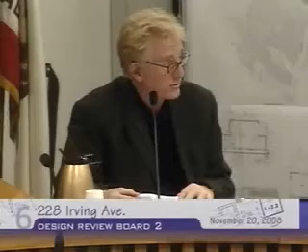Anyone wants to start? Well, I'll start because I'm going to be brief. This is a project that was before us before, and went away with conditions. So I guess as these things come back, you have to get your checklist out to see if those conditions were met.

So we can talk, and then I guess we can keep score. I'm good. Okay, well then I guess we could just go down the list. I wish some of the stuff, I know you were in a hurry to get resubmitted, but I wish you had reviewed what we talked about before so that this would be a little bit easier. So I was hoping you would do that. But anyway,

like we were talking about before, in terms of picking a style, that you would take the opportunity to pick one of those and do things accordingly, like the windows. So if you want to make a checklist of stuff, I don't know what the board's intent is. We could start making a checklist, maybe conditionally approve. I don't know what the feeling is, what you want to do.

Well, I guess staff has presented that they have met these conditions. Let's see, do we agree with that? Well, I don't agree they met, so I was going to make a list of stuff. I could probably be comfortable conditionally approving it if the board was.

I think out of all the items that we mentioned, number 3 would be the one that I would say they were not able to meet. But having said that, the original submittal was being proposed as Tuscan Mediterranean, which we didn't think they were actually going towards that direction. So I think I agree with staff, or the applicant, that now it's more of a minimal traditional style.

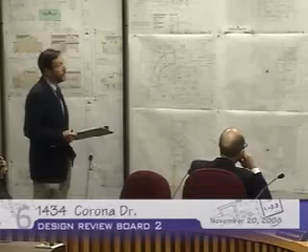A CUP was approved for the lot in July to allow a house to be constructed on the site, and now they're coming in for their design review. The overall slope for the site is about 44%. The footprint area of the house is about 54%. The applicant is allowed to have a 3-story house in that area when you have that type of steep slope, anything over 40%, so they're able to do that.

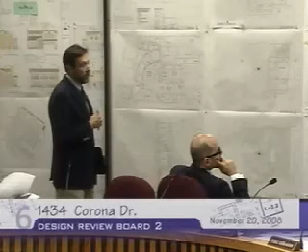Now, as far as the existing property, let me show you these photographs. You can see here we have an aerial view of the site, the vacant site right here. There's a bit of a pad right here, and though you can't see it, there's a retaining wall over there. Back in the 60s, there was a proposal to construct a new house on the site, but it expired. They did build a retaining wall shortly thereafter, but nothing has come since then as far as permits in the city, no construction on the site beyond that.

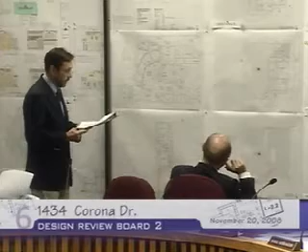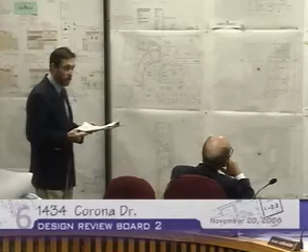As I mentioned, it's in the Adams Hill neighborhood, which reflects many architectural styles and building trends from the 20s to the present time. Homes tend to be built close together, as noted in your staff report. A quick survey of the neighborhood shows about 63% of homes are 2 stories, and about 26% are 3-story homes. This particular lot is the largest lot in the survey area that was submitted and reviewed by the applicant.

There are several categories in our comparison of the neighborhoods and of the site. Under the site planning category, we have subsections of lot coverage, landscaping, parking, retaining walls, and privacy issues. Staff felt that this proposal is fairly consistent with the intent of the guidelines and the overall neighborhood character.

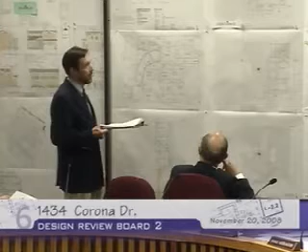In the category of mass and scale, I'd like to bring up a couple of points. It's a little more apparent when you look at the mass and scale primarily from the elevation view from the street. From the side views, you can see how the mass terraces up the hill, which is consistent with our guidelines back from 1993. We've been looking at the same sort of issue here, and that's a fairly realistic impression of how this house will look.

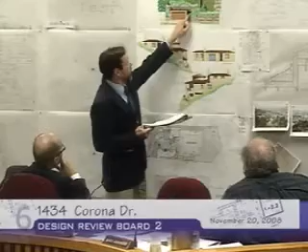The garage, and this is where the height issue comes in, is at the bottom of the hill. You can see there's a little tunnel area that goes back along the garage, and you can either go through the garage door or up and around the corner, and you go to an elevator that will take you up into the house. It looks pretty ominous, but it's all subterranean construction, or at least will be buried after they excavate to construct it.

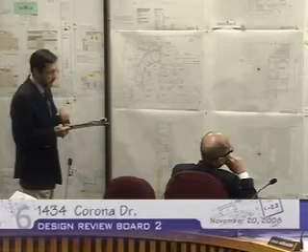One of the points brought up by the neighbors, and it's a legitimate issue, is whether the garage is attached or not, and it is an attached garage. But where that makes a difference is the overall height of the building, because if it is attached, it would be measured from this point.

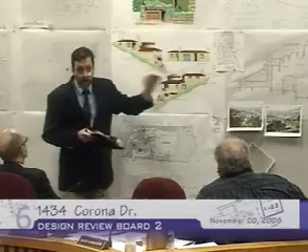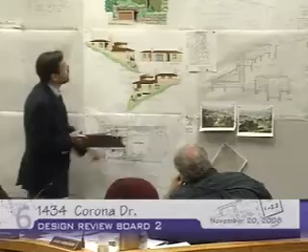If this area here was totally exposed at the time of construction, prior to it being excavated, I handed out to the applicant, to the neighbors, and to yourselves that definition of height. There is that section of the code that allows for doors and openings carved out of the hill, and the only thing exposed is not to be counted as height in the definition of height. So in this particular case, the height of the building will be up at the top, and it begins closer to this area, which we can see is fairly consistent with that area up there.

So the house is about 33 feet in height. See that up on that plate.

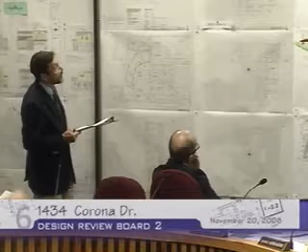As far as setbacks go, the neighborhood note shows there's a large range of setbacks in this neighborhood, all throughout Adams Hill. A lot of homes are built, or garages are built, right up to the street. This particular property's garage is set back, I believe, 33 feet from the street, and the house is set back further from there. So the overall setback is about 72 feet to the face of the building, and to the face of the garage, as I mentioned, it's 33 feet. You can see how the driveway begins at the corner over here, closest to the south end of the property, and then traverses across and enters on the north side over there.

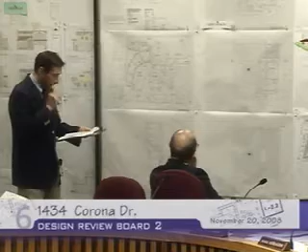In general, in our summary for this area, the mass and scale, we felt that the house fit pretty well within the character of the neighborhood and within the design guidelines and hillside design guidelines.

On the architectural style of the building, which is our last category, building design and detailing, we felt overall that the house's design, which is kind of a Spanish colonial revival style as identified by the applicant, reflects that look, and staff will say so. It should be consistent internally in terms of all the elements working together to create an attractive form. We feel that it will be complementary to the neighborhood and consistent with the intent of the guidelines.

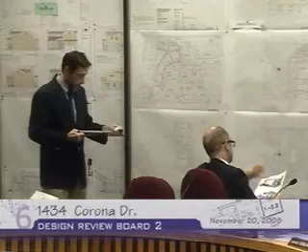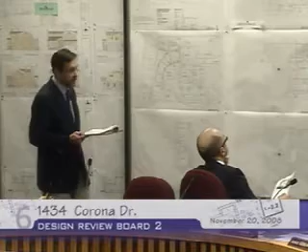The staff did make some recommendations for materials, and we noted that in our conditions below. I'm jumping ahead a bit since materials are another part of that last category, building design. We had some concerns with the retaining walls, stair walls, house foundation walls, and the decorative material that would be used. The applicant did submit some materials for you to look at, and they can go into more detail on their intent. We also had some concerns with the railings — we're looking for a little more consistency, primarily with the metal railings, since we have some that are straight and some that are more decorative. We wanted to work with the applicant on that, and also on showing the downspouts.

What we didn't want was to have downspouts snaking across the front facade of the building.

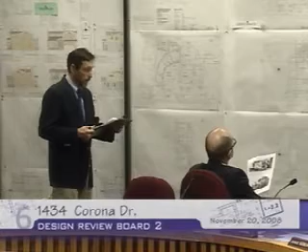One of the things the staff wanted to discuss is that we've met several times with the applicant, and the applicant would be able to discuss this with you also. We've worked from a position of providing guidance for the applicants on arriving at a project that looks like this, where the staff felt that we could support it.

In a little packet you have with some design information, you will find - in fact Mr. Malikian is holding up a copy. This was one of the examples shown by the applicant to the staff, saying we like this kind of look, we'd like to replicate something like this on the hill. What do you think? From there it became a basis for discussion to where we arrived at this project. That pretty much sums up my comments at this time.

I'll answer questions. The applicant's here, neighbors are here. Speaking of neighbors, we have about 12 letters, as you probably noted, that were submitted. I believe 10 or so were in opposition, and a couple of them were in support.

Yes sir, I just have a question on the height issue. If the garage is cut into the hill, so that it doesn't count as height, if the house came down and was near that door, at what point do you then count the low part of the building?

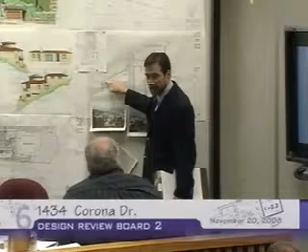Grade. When you say buried - again, now I'm confused, I thought I understood when you explained it to me before we started - but when you say buried, is it open in front of it? I mean, is it visible from the front? May I look at that definition? If I get it handed out to you, because I know...

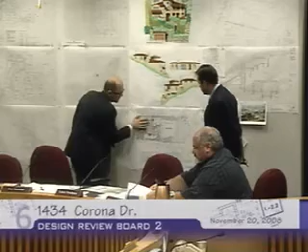I mean, the entire time of construction, this is all removed - this entire hill is removed. So this is all open. The only thing buried is on this side and this side on the map. But now that you're saying that you attach it - well, see, we see this. I'll tell you what we see: we see what you're describing most of the time. We see this kind of detachment, or a feel of detachment. This has a feel of detachment, where in reality it is attached.

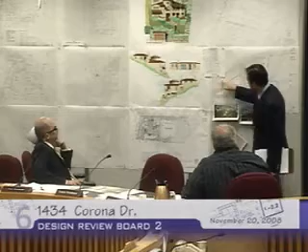And it's an excellent point that the neighbor brought up and kind of pushed us to look at it. The more we look at it, I'd actually say it works out in the applicant's favor, and he can go into detail on how we got to that point if he needs. But most of the time, we see this volume brought right down here, sitting right on this hill, attached to the house, with just stairs going up inside.

But this portion - here's the definition of height, and if you'll bear with me, we'll go through it. Height means the vertical dimension from the lowest point of the building. So let's just start off right here - this is the lowest point of the building, right here. Or right here, okay?

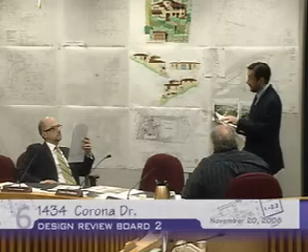Exposed above the ground surface, there it is, you can see it exposed above the ground surface, to the highest point of the roof. The highest point of the roof, right up here. A little pointer.

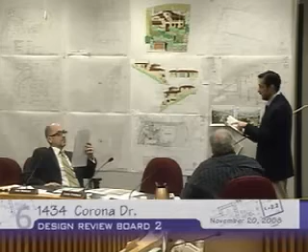Except as may be shown in diagrams, and that's some height stuff there. All right, what about exclusions? Well, the code is full of these things. Chimneys, vents, utility service structures, or portions of a building located below the ground surface existing at the time of construction and exposed as a result of excavation to create door, window, or ventilation openings shall not be included in the measurement of vertical dimensions.

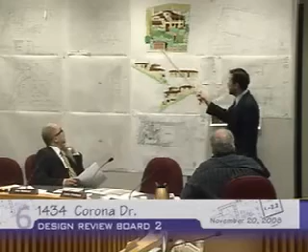So anything below grade at the time of construction? No, at the time of construction. So if this is accurate, and Mr. Gobian is probably one of the premier hillside guys around here, so he knows what he's doing on all these things. Showing this under grade, this is underneath. This door is being exposed. This opening here is being exposed as a result of excavation. And there you have it.

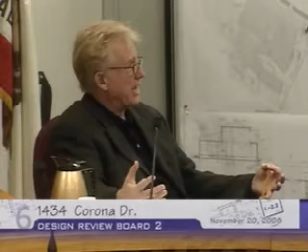Okay? Chris, I have just a question, and I don't for a moment want to upstage the letters that have come in for and against the project, but just my preliminary look at the letters, the homeowners that are in opposition all cite Adams Hill area as more conservatively sized houses, Yes, and they point to this one as a very large house. Yes, sir.

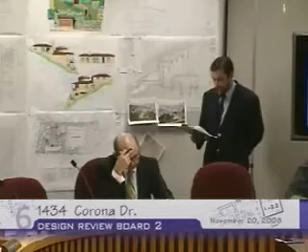Could it be characterized that way? All right, well, let's look at our staff report real quick, and we'll go do a little look at that. On page 2, one of the questions that we have, we have 2 points really: house size and floor area ratio. So the house size, we have a range from just, let's say, 1,400 square feet to about 3,650 square feet. That's the range of homes in the neighborhood. Mm-hmm. But the average is about 2,200, 22 and a half, okay? This particular house would be 36 and a half. Excuse me, 33 and a half.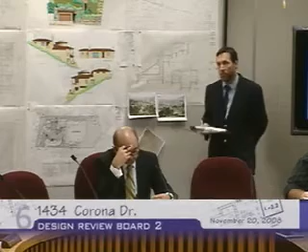So is an extra 1,000 square feet, is that considered to be substantial? And that would be, for staff's point of view, in fact, I think in the planning department, a house size is less of an issue for us than how does the house feel. Does the house feel that it is massive, announcing itself, primary importance, the rest of you guys are losers on the block? That's a big issue. If you can make a house feel that it fits with the character, it could have a pretty substantial floor area.

So staff felt that the house overall, because of the design features and the way it works in the topography, is meeting that characteristic. And plus, being set further back up is kind of pushed away from the street. So it sort of takes it away from the presence right on the street.

Okay, well, we have people who disagree. And thank you. And for those of you keeping score at home, just remember that this board up here, under the new design review guidelines, we're not heavily dependent, but we give great weight to staff's thoughts and recommendations as far as massing go. And that, believe me, as a veteran of these wars, that doesn't completely sway my judgment, but it is a factor. All right, sir. Any more questions I can?

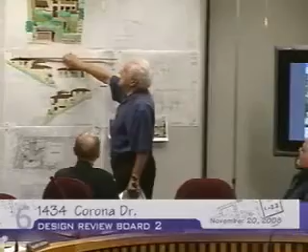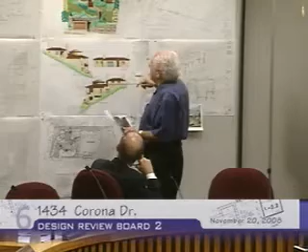If you look at the survey on the right side there, you will see the first floor of that—may I come close to show that? In this house here, I am reading the elevations done by a licensed surveyor, 585. Now, the top of the highest point that we have here is 15 feet lower than this backyard, or side yard, or whatever you name it. So by comparing the house on the left side and the right side, we decided to design our site in a way that gives the best features—the landscaping, the distance, the depth. By doing that, I believe this is one of the best projects that I have ever designed in the City of Glendale.

During this long time of several months, we had several... My time has expired. Your time has expired, so if you can—you have another minute to continue.

Okay, we had several meetings with the staff at the city, and we went through a lot of changes and massaging and different options. We made maybe 3 colored elevation renderings to see which one was right, and we ended up with this version, which I believe is authentic. Beside what you see in those pictures, we are trying to use even more detailed, artistic materials to enhance the quality and originality of this Spanish-style house.

The owner is willing to spend the money, which I appreciate—not everybody wants to do that. Some people want to make it as inexpensive as possible, but I believe this will be an addition to that neighborhood. I hope and wish that the neighbors, instead of objecting, will appreciate what we are trying to do here. Thank you. Thank you.

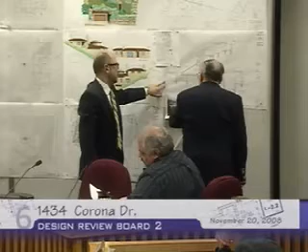Is this existing now? No. So that height—what we're being told is that this natural grade is existing. Okay, but in that height description, that exemption, it says it has to be existing at the time of construction. Does the natural grade need to be existing? Am I correct, or I don't think so. Read that.

Yes sir, oh yes, I'm okay. Could you read it to them? Yes, what I'm talking about—it says that it's existing at the time. The ground surface existing at the time of construction and exposed as a result of excavation to create the doors. Okay, to create doors. Yes.

So what you're saying, though, is you have a concern that a portion of it is being filled in as opposed to being excavated. Is that your concern? Well, what I'm concerned about is the tunnel itself, pushing the house all the way back up on the hill.

We've got a situation up there where there's no fire access to the top part of that house. The only fire access is at the street level. And with the fires we've been having in recent times, and the fires we had on the hill when John Orr was around, it's quite a serious concern, because that house is brought up, way up the hill, right up under our property.

And if that house were to catch fire, by the time the fire department would drag up the hoses from the street, the thing could be well engulfed. A 3-story house would be just like a torch for underneath my home. Now, I've lived on the hill for 52 years, and at this present site for 40. Well, I bought the property in 1960 and started construction at that time.

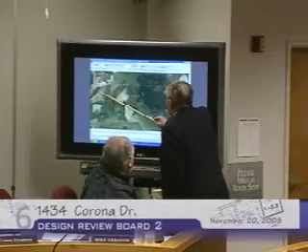Right, you don't get the impression of the distance and the depth, or the effect of where that house is located, on this map. I can show you on the maps that I brought and included in the letters to you guys. Here, let me—you need another view. You need to step back and speak over there because they can't hear you on TV.

Did you receive my letter of the 20th? We have, yes. And as I say in the letter, I'm convinced that this house has an attached garage. Whether the exemption for height or otherwise makes any difference, I don't know. But I'm concerned as to the tunnel, where it's located, the elevator.

The elevator is 75 feet up from the bottom. Is that right, or where does it show on the pictures of the house up there? It's within the house itself. Yes, you cannot see it. Well, on that one drawing there, it shows part of the section, but it's within the dirt and it's beyond, it's in the house. So from the exterior, you're not going to be able to see that.

Now the house is moved way back up on the lot, and as you said earlier when you were considering the possibility of it being moved back down, is there any reason it couldn't be moved back down somewhat? Because at present there's a serious problem with privacy in my home, privacy on both neighbors, and also for the new house. According to the plans, I believe the master bedroom would be immediately into our house, and if it were moved down somewhat down the hill, it would make a big difference.

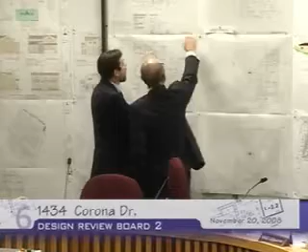Then from that point, let's say 585. Well, let's go with the concrete surface, so 583. Okay, and then we come over here. We want to find the overall height of the house. It says 568, but you have another. That's right. Now this says 68, but I had... say 72.

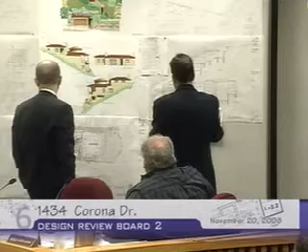At least 11 feet, I can't... yeah, like 11 feet. And I had some other information. I had to wing it here. This distance may not be that height, but it ranges between... Mr. Copeland said it was 15.

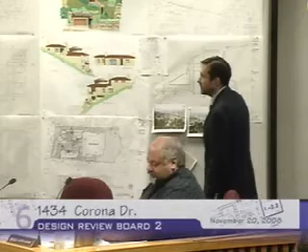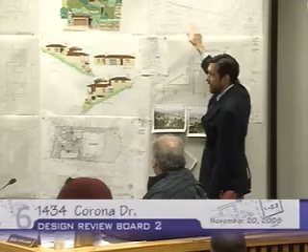You're coming up 11, so it's between 11 and 15 feet. The thought I was going through, because we see a lot of this, is that if a person's sitting out here on a chair, the pad his feet are on is 11 feet higher than the tallest point of the house below him. So does it block his view? It's 11 feet lower than his pad, even if he were on a lawn chair laying out. I know that's just 11 feet lower.

There's a block of view, and I think we don't have a view protection, but in terms of just looking at it from how we see other projects, this is a fairly sensitive situation, considering the way we build homes in Glendale.

Any more questions? One quick question. Yes, this map, I think you've got a copy of it there. Okay, you can just leave it with us. I've got a copy of it.

The point I was getting at is when you look at this map now, you get a better perspective. This is an aerial view, you get a perspective of where that property is. It's right there. And when you've got all of this property down here, that's going to require fire protection and what have you. It's a real rhubarb.

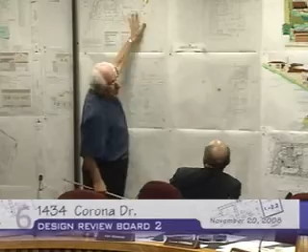This is the house, and that is the roof of this house. If this distance is 42 feet, that's almost double of that distance, which is close to 75 feet distance between these two houses. It's not 15 feet.

However, I think the time has changed. It's not the 1920s or 1930s. This house will be built with new features like fire sprinklers. We have an escape way on the right side, with steps that will provide the fire department with that exit way. These plans have to go through a very extensive plan check regarding zoning issues, fire issues, and building issues, and if it's not done properly, it will not be approved by the city of Glendale.

Mr. Copeland, I have two questions. Before I even heard the neighbors or anybody, my first question was what was the reasoning, or how did you determine the location of the house in relation to the slope of the land, being that both homes are much lower than where this one is? I understand the concept of being 72 feet back and much higher, but the vernacular of the site or the street, you have this, and then you go back up. So I'm wondering what was the reasoning by you? I'm sure you've done many of these, so understanding the thought process of where to locate this building.

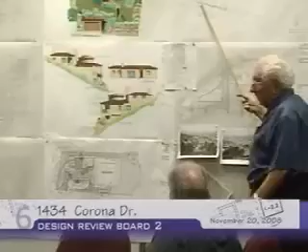Yes. The elevation difference at that location—if you look at the survey, you will see that the contour lines are very close to each other. May I come closer to show you? You can see these contour lines here are very, very concentrated—a steep slope here. And if we have to have an 18-foot setback for the garage, as it is in the code, we end up with high retaining walls here that will be higher than the allowed maximum of 7-foot in the front setback, or 5-foot.

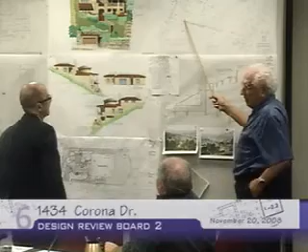Okay, so it's basically code-driven, because you are substantially removing dirt from the other end also. Yeah. By the way, I'm not exactly following the existing driveway—partially, maybe it's close to that, but it's not exactly the same thing. Okay, all right, those are the two questions.

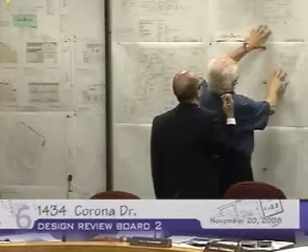It's a clerestory, 3 stories. Okay, yeah, I see what you're mentioning. That is a patio in the middle, we get light from there. But there's no windows, there's nothing - no windows on any floor. It's open below, but there's no windows that open on it. It's all glass, and it's all solid wall. It's all solid walls all the way up.

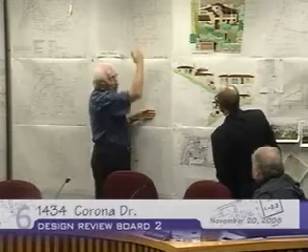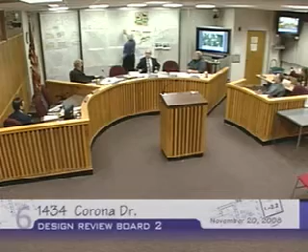On the lowest floor, then? On the lowest floor, second floor? This is the second floor. We have 2 bedrooms, it's going down to the 3rd floor on your section, that's why - down to the lowest floor on your section. I'm trying to see the plan. Okay, this is the lowest level, then we have this level.

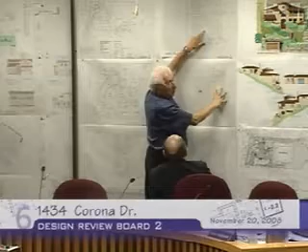Then we have this level, and that is here, right? Which is the dirt at that point is higher than this, because the slope of the dirt goes high.

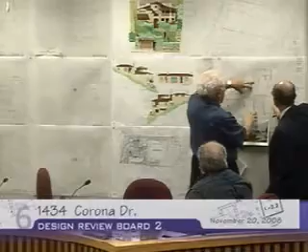I'm looking at your section, it's 3 stories tall. Your section BB, 3 stories. This is the stairs going from 2nd floor to the bedroom on the back 3rd floor. So this is what he's talking about. You're showing a 3-story section. Anyway, we have a glass there. Maybe the sections are not complete yet, but we have a glass there.

I have some comments, and I appreciate this, probably the first. I would like the staff to encourage applicants to do the following, as Mr. Hakopian and the applicant has done, to give us some examples of inspiring images so we can understand where you're coming from.

I think the building is done exceptionally well. There are definitely areas that have been really thought of. I'm not really sure exactly the location that the landscaping is a factor of moving the building up, but I don't have enough information on how the relationship is going to be with the building in relation to the adjacent buildings. From looking at the survey, it is going to be substantially higher.

So I agree with Mr. Garagos that moving this building up will be beneficial to the houses that are mostly impacted, the adjacent houses. But as we move this building up, there are other homes above the house that may get impacted. Based on the location and the staking that was there, and also the location of the roof with the elevation heights, I truly believe that you will have enough clearance there that it's not going to obstruct your view. It is going to be lower. It is 75 feet away.